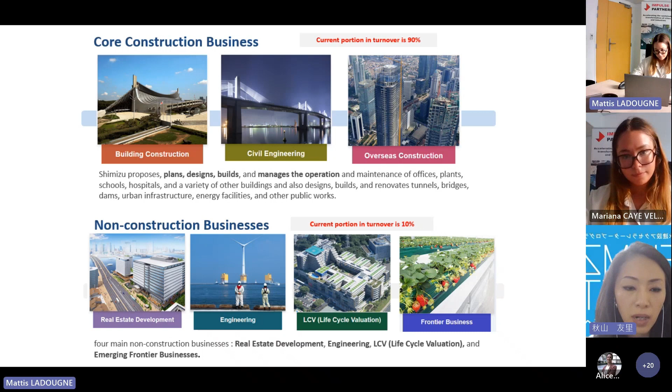Our business model is quite unique. We're involved not only in construction management, but also in planning, design, and construction management of architecture, buildings, and infrastructure. Currently about 10% of our portion is non-construction business, which includes real estate development and engineering, like the energy sector, life cycle valuation, and frontier business, more focused on sustainable actions. We also have a great global network with 32 global offices around the world. I'd like to introduce our new accelerator program afterwards, but you guys can use our great network.

Yeah, and this is our sustainability and smart innovation vision by 2030. We would like to focus on a resilient, inclusive, sustainable society to realize that.

Now I'd like to introduce our new accelerator program called Shimizu Next. This aims at solving issues by realizing a resilient, inclusive, and sustainable society. Currently we focus on three main pillars: construction and urban design, resilience, and environment and energy.

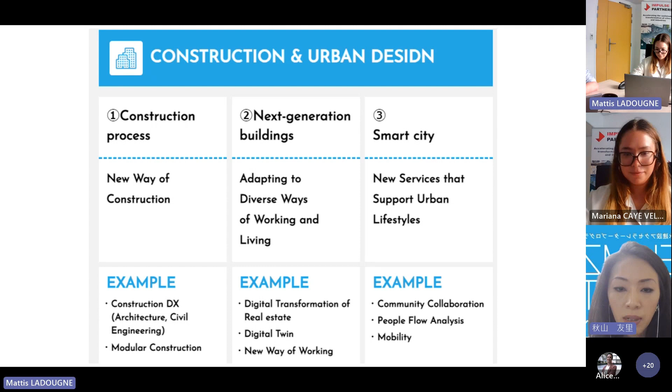From the first pillar, construction and urban design, we focus on three points. First is a new way of construction, such as DX and modular construction. Second is adapting to diverse ways of working and living, such as digital transformation of real estate, digital twins, and new ways of working. Finally, the third is smart city, which could be people flow analysis, mobility, and community collaboration.

From the second pillar, resilience, we would like to focus on disaster prevention, mitigation and prediction, and also security and BCP measures. From the third pillar, environment and energy: energy saving, renewable energy, and storage, and most important, decarbonization. We focus on CCUS, CO2 emission calculation, low carbon materials, and finally circular economy.

Yes, sorry. It's all right. Yeah, go ahead.

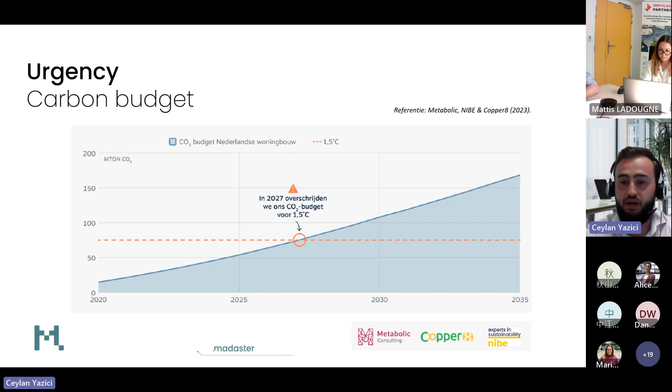This isn't specific to the Netherlands - well it is specific to the Netherlands, but I think every country will have this, and we all need to do a lot of work in order to not override the CO2 budget. That's where we come in, as Madaster will provide a tool to gain insights via a couple of APIs. We started as a register, and we're becoming more and more a tool to gain insights into circularity data and implement that within your business to reach your goals.

Madaster generates insights into materials and products and their locations, as well as their impacts on the environment, their future financial value, and potential reuse. We think that if you register it, it becomes more clear how you can reuse it, and we can drastically reduce CO2 emissions and waste.

So how does that work in practice? Here you can see a little visual of how Madaster works. Firstly, we have an input that we can see as an Excel template or a BIM model - the BIM model uses an IFC format, which is the one we use the most. The more input we have, the more output we can generate within the platform.

You will load in a BIM or an Excel file, and this will have some circularity data. Within the data, it will be connected to a database, which can say, okay, we will connect circularity data of concrete within the BIM model, and we can do that broadly within the whole model. What that will do, if the whole model is linked to the database and the circularity data, we can gain insights, generate material passports, and say something about circularity, embodied carbon, and financial valuation.

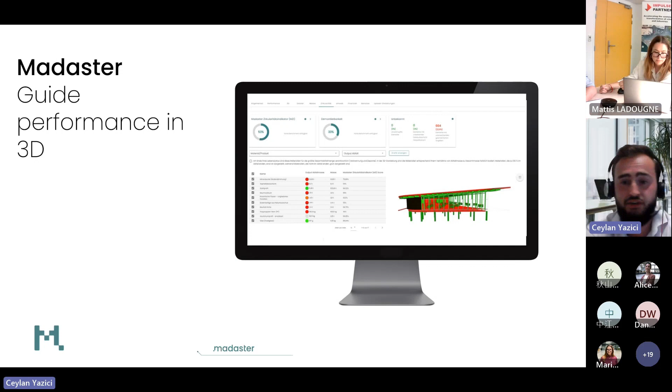Madaster can report and certify, so we can generate a material passport. For example, in the Netherlands, when you have a material passport, you can gain 1 BREEAM credit, and I can imagine this will also be in other countries. It's also possible to get a passport that's more a general summary - just quick circularity insights and that kind of stuff. But you can also generate a whole technical report which contains every screw that comes with it, if you want. So the platform does have that capability.

It's also possible within Madaster to benchmark. So if you have a building A and you are now doing building B, you can compare them with each other and see which building will score better.

Some use cases - please also click on it. We're also busy now with the Dutch Expo Pavilion in Osaka called New Dawn, which will also be fully registered in Madaster, and it will be designed by the Dutch architects, RAU Architects. So please, if you have the slides, click on it - these are some user cases of Madaster.

We use a partner network within Madaster, and we use that within the whole of Europe, and we hope within the whole world. With the partners, we will accelerate our knowledge and gain more and more data in order to better the platform and make the usability more friendly for everyone.

There are many issues with diesel generators. Construction sites don't like using them on the whole, even though it's been a de facto power creation method for a lot of these sites. They cause a lot of noise, which is bad for the local community but also for the people working on site. They tend to be pretty unreliable, so they break fairly regularly. Funnily enough, the cleaner versions of the generators seem to break more frequently.

You also have to refuel them, bringing trucks of diesel inside. It takes up space because you need diesel tanks next to the diesel generators, so sites really don't like having to operate these. The diesel itself is actually a fire hazard, so you have to be extra careful with those hazardous materials and store them properly. Most diesel generators are old technology, so they don't have any connection or much data you can get back from them, so you can't really see how they're operating or how the equipment connected to them is operating.

But most importantly, of course, they have a very high carbon footprint, and they emit a lot of air quality pollutants too. These generators run all day during the construction process, and they are very big engines, so compared to cars, they emit a lot of pollutants.

So what we did, together with this company, is develop the Ampd Enertainer energy container, a cloud-connected energy storage system designed specifically for construction sites. There are things we've done to make this as simple to use as possible - it's a very easy to deploy system, very similar to a generator, with a lot of extra safety aspects built in for the construction site.

It's mobile, so you can move it around - you can see it's got rigging points around the top, so it's easy to move when you need to. It also has a digital platform focused specifically on the construction industry, which has been very well received, because we can often do preventative maintenance, see if issues are happening, and get a lot of operational data back from it.

How this works is essentially a lot of construction equipment needs quite high power, but not very frequently. A crane, for example, when it's lifting a weight, tends to have a very high power spike, but then most of the day it doesn't do very much - say 95% of the day it's not doing very much.

But what you need to do is power it with a very big diesel generator, which just sits there idling, burning fuel a lot of the time because it's not doing anything. What you can do with a battery is take a much smaller power feed and have the battery manage those very high peak loads.

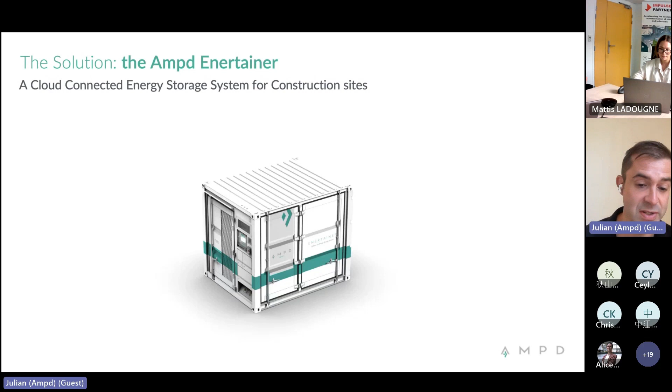Just to give an example, on some large cranes you might need 400 or 500 amps of power, which would usually require a 400 kVA or 500 kVA generator. We can power that on 20 or 30 amps. So you can either use a very small grid connection, or a very small generator run very efficiently, which vastly reduces the amount of diesel and emissions. And if it's a grid connection, you can sometimes have no emissions at all.

What this means is you can reduce your carbon footprint by 85 to 90%. Actually in the UK it's more like 90%. You can completely eliminate the air quality pollutants which affect the workers and people around the site. It's much safer because you don't have to handle the diesel.

It's 32 times quieter than a diesel generator, which not only is better for the workers and their ears and the local community, but actually allows sites to work longer hours sometimes, because a lot of sites have limitations on noise up past certain hours.

And also what we found out is it's more cost effective. So you actually can save money by using a battery on these sites, which is actually why most of our customers do it.

We give a lot of data back. So we have remote operations and maintenance, and it gives the site, sustainability people in the construction companies, the operational people with the unit, the project directors who want to understand how busy a crane is, a lot of data back that they can understand how their construction site is going.

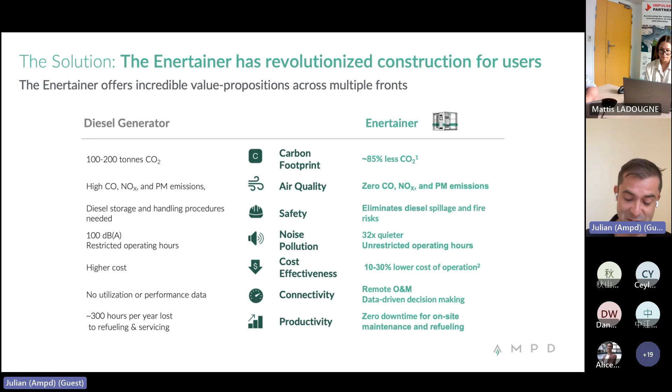And it also increases productivity. Some of our customers tell us they lose 300 hours of productivity per year due to refueling and servicing of the diesel generators. Our product is incredibly reliable, which means that people can just leave it there. It does its job. You don't have to touch it or anything like that.

So because of all these factors, we have been relatively successful. We delivered our first product at the end of 2019. And since that point, we've had 200 units delivered. Those 200 units have now clocked up over 2.2 million hours of operational time across 170 projects.

We have over 60 customers in Australia, UK, Hong Kong, and Singapore, and we're operating in those regions. We're having units now being sent out to the UAE and the Middle East. So that's coming soon.

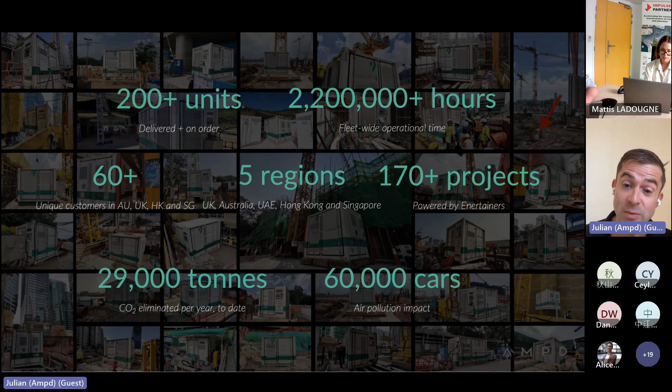Most importantly, we've mitigated over 29,000 tons of carbon dioxide which otherwise would have been emitted. And we have removed the equivalent of 60,000 cars from the road in terms of air pollution.

And the great thing is it continually updates over time, so the product gets better and better. And we give real-time operational data. There's remote maintenance functionality where we can understand what's going on with the unit and prevent something before it happens. Carbon reduction information in there and energy reduction information.

And then we also provide things like monthly reporting for people to go back and see how the unit's been operating over the previous months, which is great for sustainability people, energy people, even the people who look after the product.

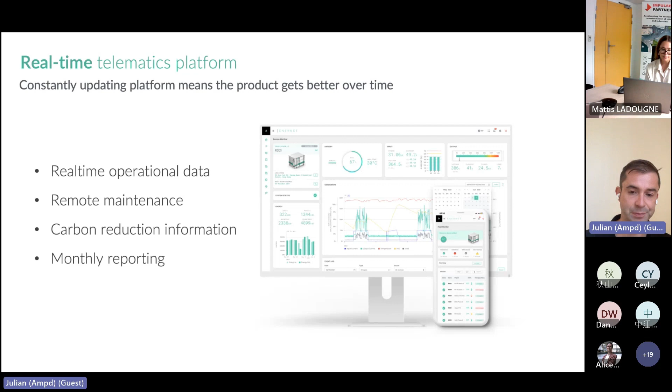So what we have now done, as I mentioned, is expand our initial product line. So the Enertainer was really our first product. The Enertainer M and the Enertainer L were our initial product. But what we've done is taken our expertise and expanded it into a higher energy product.

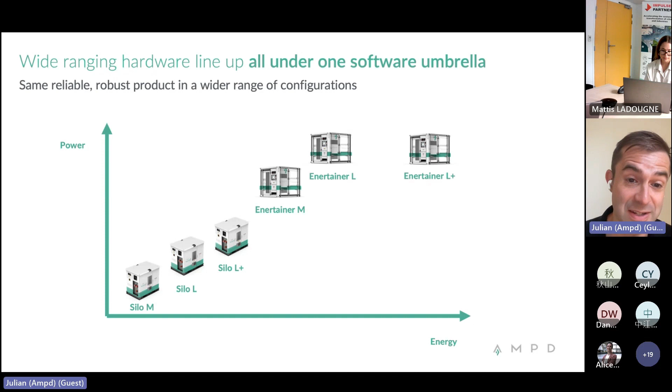And we're also next year bringing out the Silo. The Silo is a smaller energy storage system, which will be usable and more economic in certain smaller power use cases. And so we have a different range there.

And these are just some of the things that we have either had customers come and ask us about, or we've actually implemented, which are different types of use cases. So with the smaller unit, we can look at smaller site office setups, smaller cranes, concrete plants, the operation of which is often driven by diesel generators, welders, maintenance, roadside maintenance, even railway maintenance as well.

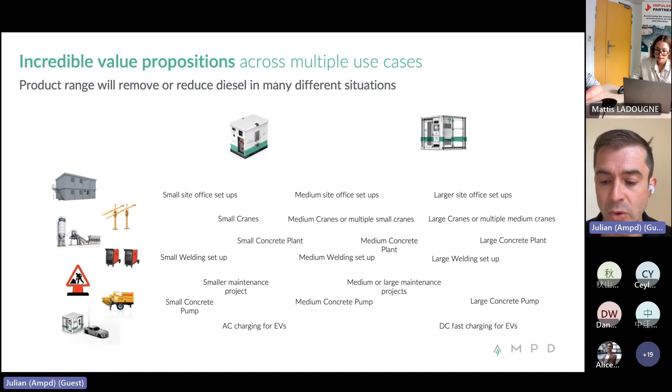Concrete pumps, which require very high power when they first start, and then EV charging. So we see that specifically in the construction sector, where more and more equipment is being electrified and needs powering.

And so that is my presentation. Please be in touch with any questions.

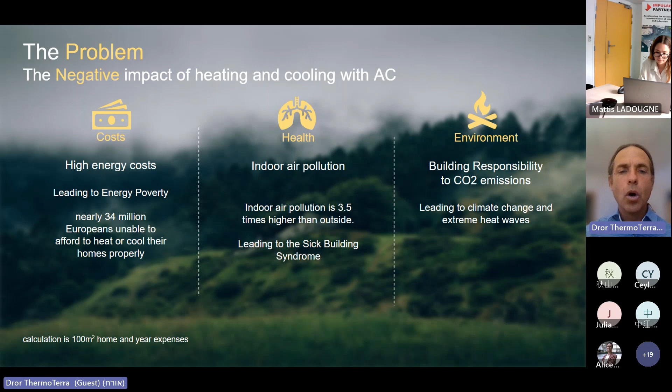On the cost issue, we can save 50 to 80% of the energy needed for heating and up to 100% of the energy needed for cooling. Thereby we reduce the carbon footprint of buildings, and we can make our system also with carbon capture materials. On the health issue, we are addressing 5 different aspects of our well-being, including radiative temperature, humidity level, and fresh air.

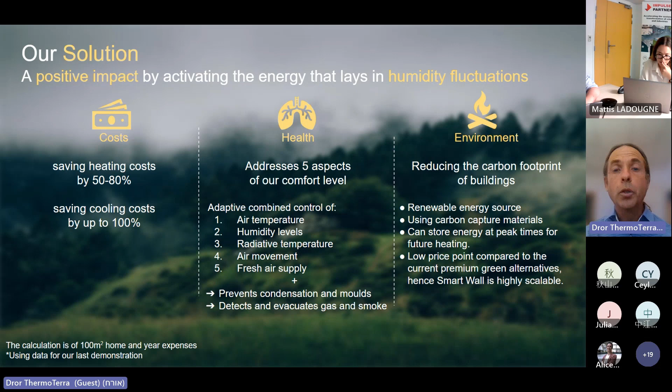So how are we doing that? We are taking the absorption capability of off-the-shelf construction material, such as bricks or insulation, and making that material into a humidity reservoir. Once we evaporate humidity from that reservoir, we get evaporative cooling. And when we harvest humidity back, we get absorption heating.

We are using air canals, such as holes in the blocks or air gaps in the walls, and use our IoT ventilation unit to blow ambient air through it, and then control whether we are going to do cooling, heating, or absorbing humidity for next cooling.

On the right, we can see a tiny construction we made at one of the universities in Israel, built alongside a reference building used there for different researches. We are going to see in the next slide the results.

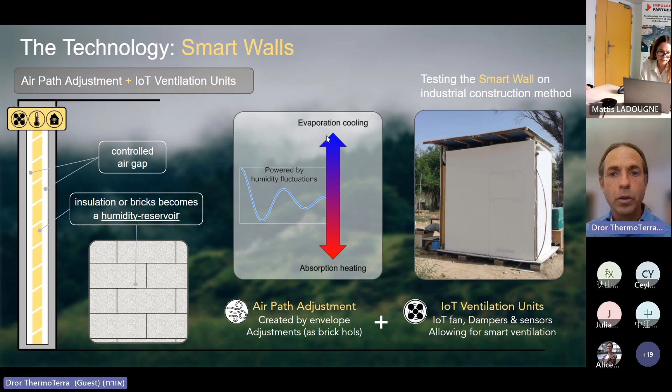On the yellow line, we see the ambient temperature reaching almost 36 degrees. On the orange, we see the reference building getting to 32 degrees. And on the blue line, we see Thermoterra technology walls cooling the building by more than 10 degrees, making it comfortable all day long.

On the left side, we can see how this happened. During the night, relative humidity was higher, which is what usually happens at night. So our reservoir could harvest humidity from the ambient air. In the first hours it was stored, and then when cooling was needed, the wall started evaporating the humidity, getting this amazing cooling result.

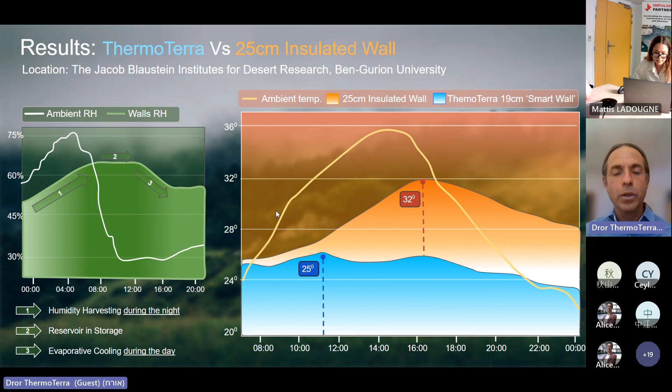On this slide, we see a few days of results, starting at the same temperature. Both buildings started at the same temperature, but our construction, using its ability to cool, kept 24 degrees all of those days almost without any energy needed, just using energy harvested from humidity fluctuation. And although our construction was thinner than the reference construction, it had amazing cooling results.

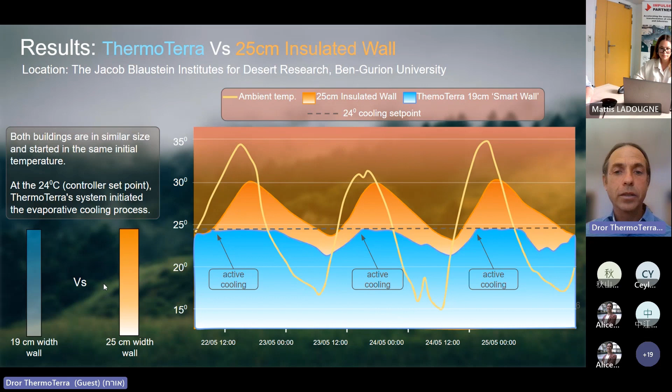There are many companies trying to solve the negative effects of air conditioning. Some are using smart thermostats, others evaporative cooling or even photovoltaics, and some heat recovery ventilation. But there is no company doing all of it in a cost-effective manner with a low carbon footprint.

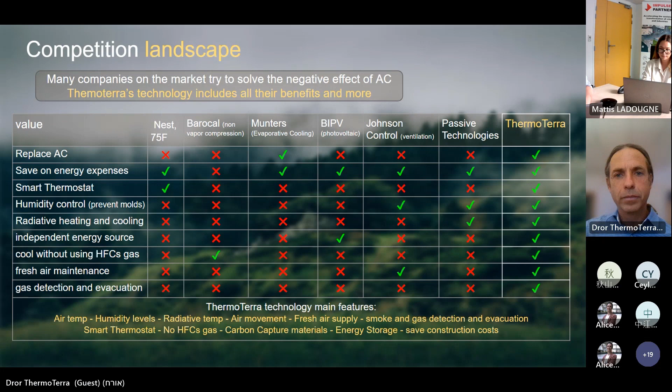In our business model, we use our construction partners' capabilities, so they will make the wall adjustment, creating Thermoterra-ready walls on the market. Then we directly sell our services and IoT ventilation unit to the customers. Our partners will not only gain easier compliance with regulation and provide a premium building for customers, but they will also save directly on their costs.

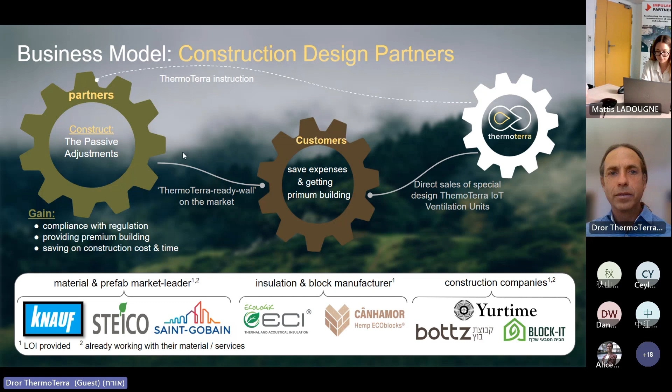In this example, we can see that our construction partner can save 10 to 20 euros per meter just by making the walls thinner. And the building owner, the end customer, will return the investment in only 26 months.

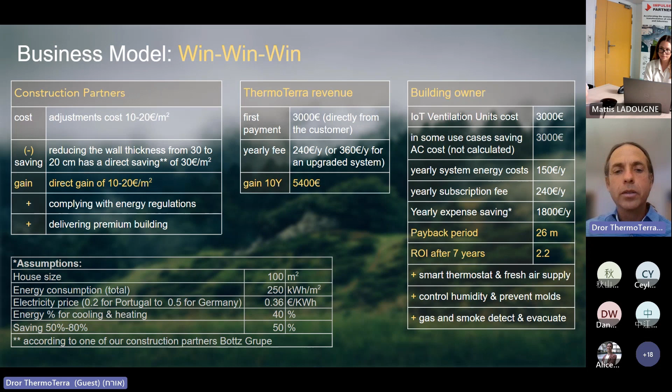The global green building market is huge, more than 700 billion. Still, we are addressing a very small market. Our entry market is natural fiber insulation, which is best suited for our adapter since it's conscious of both carbon footprint and health issues.

We already got engaged with some construction partners and manufacturer partners. One of them is Steico, a German insulation company that sells for more than 60,000 houses a year, and the construction you saw before was built with their materials.

Our next market is building retrofit, a huge market in Europe, where they are planning to renovate more than 35 million buildings by 2030. We will also address the building-integrated photovoltaic market, where on top of cooling the building we can reduce photovoltaic temperature, thereby increasing their manufacturing capabilities. We will also address the double skin facade market and the acoustic tile market.

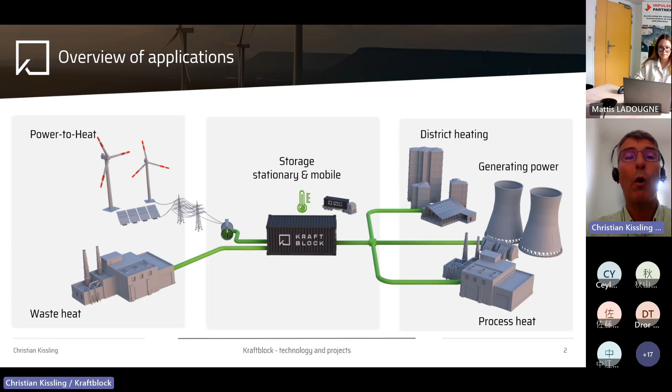The speciality, the unique selling point of our application, is that we can tap energies up to 1,300 degrees Celsius. We start about 350 degrees upwards. We have a very modular setup. As you can see, the containers are 20-foot containers, either one or several of them, and the storage duration is from several hours up to 2 weeks.

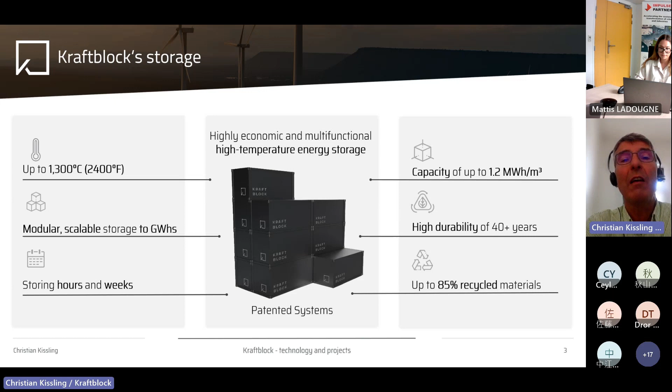Our material is a granulat, which I will show you a little bit later on. It has a very high heat capacity. We tested our material in life cycles up to 15,000 cycles, heating it up from ambient temperature up to 1,200 degrees and back, and we figured out there was no degradation. What's very much of interest is that the material of our pellets contains up to 85% recycled material, which is, for example, slag from the steel or glass industry.

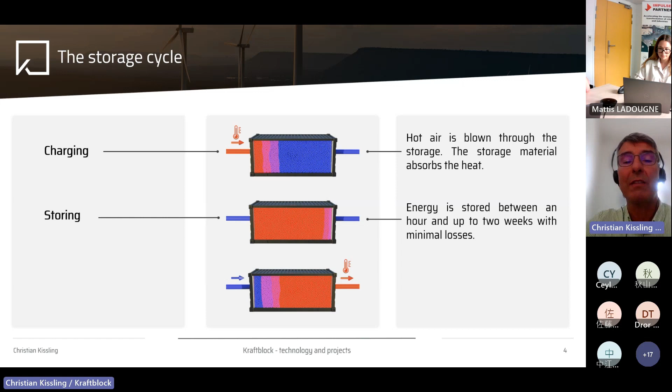How does this storage work? In the storage container you see these pellets, 2 to 4 centimeters in diameter. It's actually just a container with an insulation system filled with the pellets. The charging is done by hot air, which is blown through the material and heats up the pellets to the related temperature. During storage, the temperature is kept within the material at that level for up to about 2 weeks, depending also on our insulation system.

During discharging, when you make use of the energy, we again blow ambient air through the container. The air is heated up from the material and serves with the temperature whatever you have stored for the downstream processes. For the downstream processes, we come out here with, for example, 800 degrees. If you only need hot air of 200 degrees, it's just a simple apparatus to adapt, like a mixing chamber, where you use ambient air at 25 degrees with the 800 degree air and mix it down to the required temperature level. Similar for steam production or thermal oil heating. That means the storage is made very simple, and all the apparatus needed for charging and discharging are outside of our storage system.

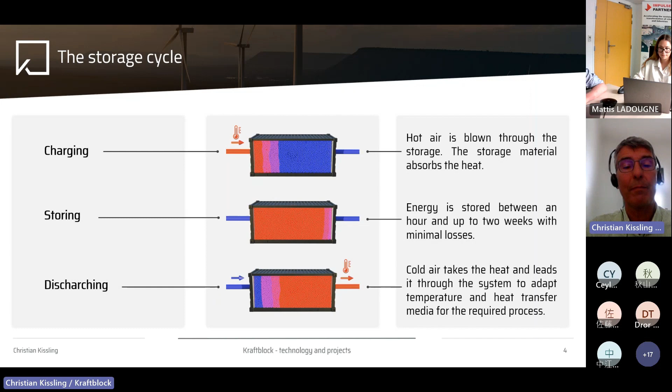Now I'll cover how to charge it via the electricity side. It's via green power, meaning we use either solar or wind power and so-called power-to-heat systems, which are like industrial hair dryers, if I may call them that. They are available in megawatt class and serve temperatures up to 800 to 1000 degrees. We store the energy here and then serve it for the downstream process.

The advantage is that renewable energy is mostly cheap power which can be used in the European market. We have fluctuating power prices on the stock market, and you could also benefit from the volatility of power prices. Curtailment of especially wind power in Germany can be prevented. It supports grid relief, and we can decarbonize downstream processes up to 1000 degrees, replacing fossil fuels. The industries include food, chemical, and steel industry, and all industries needing process heat up to 1000 degrees, or of course lower levels, down to district heating of 80 to 120 degrees. This can all be done by related apparatus downstream.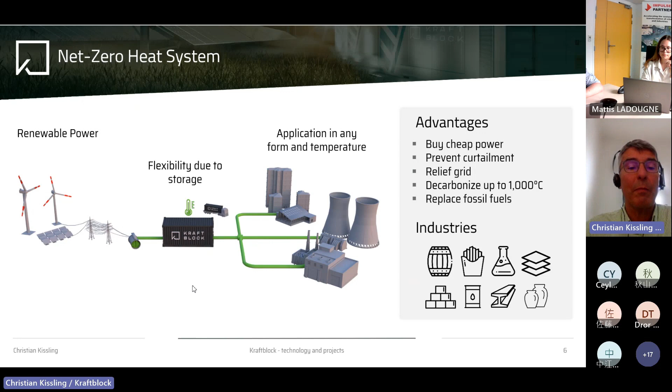We have this PepsiCo project I mentioned, where Eneco is the utility, and we take the power to heat up our storage system to 800 degrees. We are presently building the largest worldwide commercial high temperature heat storage, with a total of 150 megawatt hour useful capacity, built in 5 new modules. Two of those 5 modules, which you can see here, we are realizing by end of this year.

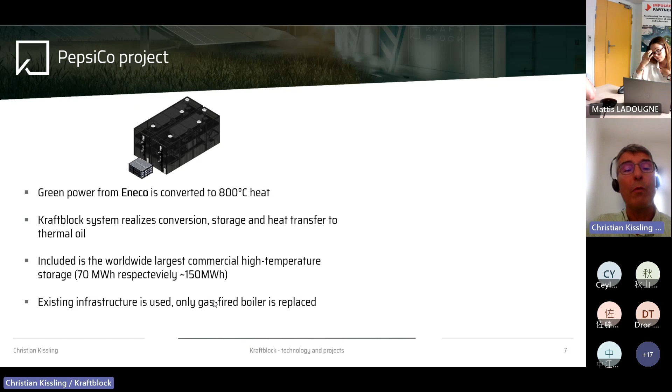We are using the existing infrastructure, and just the gas-fired boiler required in the potato chip production for heating up thermal oil is replaced with our storage system. That means the thermal oil needed to heat up frying oil for the potato chips will not be heated by a gas-fired application, but by hot air of 800 degrees coming out of our storage system, heating up the thermal oil from 250 to 300 degrees in order to do this process.

At the end of the day, when all 5 modules are installed, 98% of the emissions will be avoided, and PepsiCo is offering green potato chips.

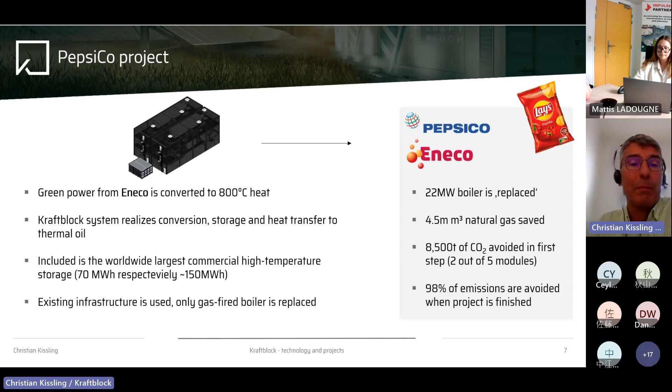Next application is the waste heat application. Here we take the waste heat from industries, which will be stored in our storage system and can be applied downstream for whatever is used on process heat.

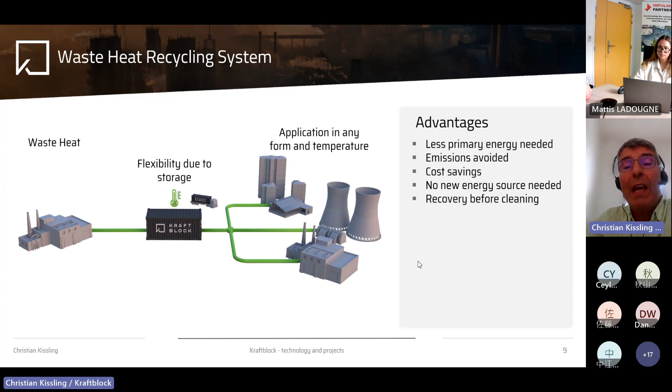Using waste heat, we have a reduction of primary energy. We are reducing emissions. We have cost savings, no new energy needed to be tapped. And we can even take high temperature heat from the glass industry or steel industry before the cleaning process.

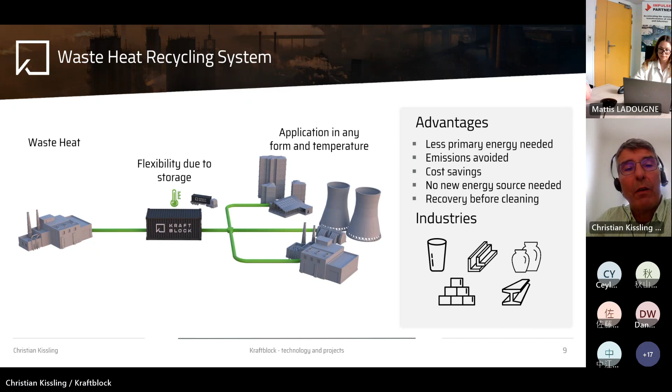The waste heat projects we have, three of them, I'll go through quickly. This is our reference plant where we take heat from a batch oven in the ceramic industry, collecting it for use in the next heating up of a batch process.

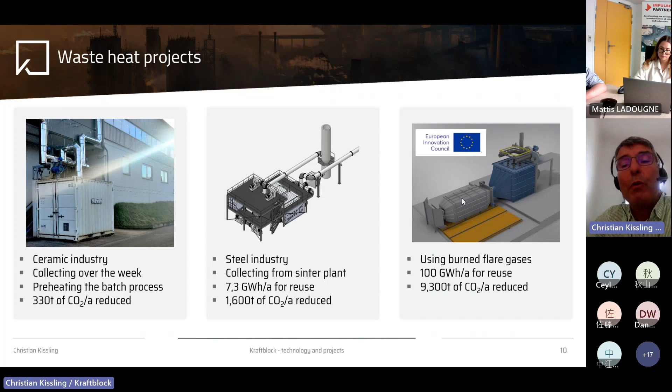This project is in the steel industry with Tata Steel. And the last one, which we are just realizing, is taking flare gas from the steel mill, combusting it in an adiabatic combustion chamber, serving it at a temperature of 1200 degrees, putting it into storage, and in this case also applying it as mobile heat.

That means this heat will be transported from A to B, as you can see in these devices, in this scheme. This is opening new business models with waste heat, meaning heat of up to 1200 degrees can be transported by truck and coupled to a downstream application.

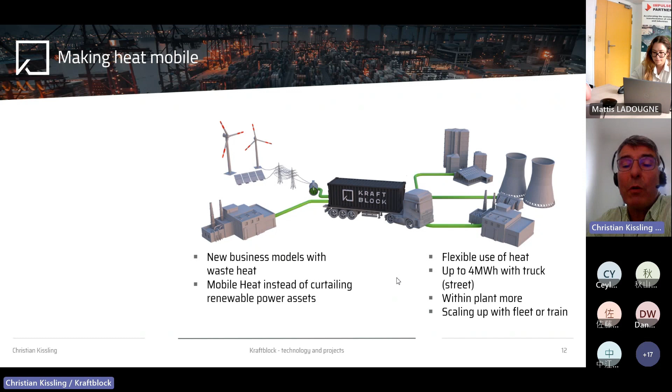Up to about 3.5 to 4 megawatt hours useful can be transported. The problem is the street has a maximum transportation weight, but it can also be scaled up by a fleet or even a train application.

And we already have a first mobile heat application up and running in the city of Hamburg, Germany. We take the waste heat from a biogas combustion engine, the exhaust heat at about 430 degrees, put it into our storage, truck it from A to B, and connect it on a docking station.

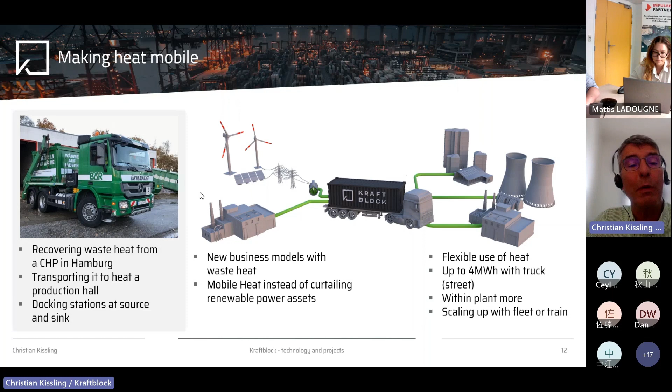To heat up an office building. So this is a kind of decoupling, not only time-wise but also location-wise, of energy, bringing it from A to B and making the best benefit for decarbonization.

And it's the last slide, about district heating solutions which can be applied via our system. We can take different sources, but they can all be handled within our system, increasing the flexibility of a district heating system or a quarter heating system.

It's a cost saving of available cheap energy. We are decarbonizing all this district heating. And what is also maybe of interest in case of integration of a new district heating system, in the beginning we can start with a so-called two-point grid when using this mobile application.

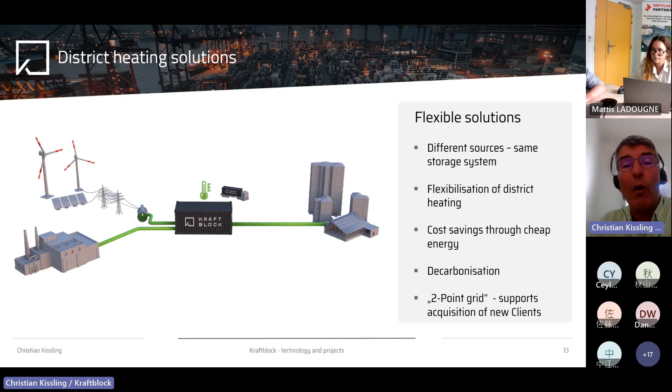So the acquisition of new clients can be supported because it takes a certain while until all the approval is given for a related connection and later the realization itself. But using heat transported by truck can overcome this at a very early stage in order to serve new clients with district heat.

And yes, this is it. Thank you very much for your attention, and if you have any questions, please let me know.

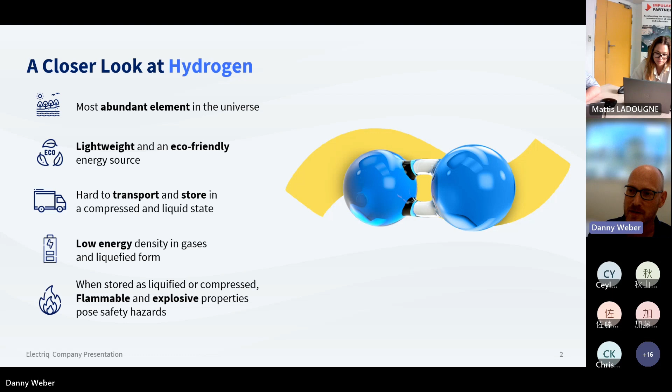It's hard to transport and store in a compressed and liquid state. It has low energy density in gas and liquid form. And when stored as liquefied or compressed hydrogen, it is flammable and explosive, which obviously is bad, especially on construction sites.

So Electriq pioneered a breakthrough technology that will transform the way hydrogen is stored, transported, and used. We have developed a novel type of hydrogen ecosystem based on the energy-rich proprietary powdered hydrogen, which I just showed you, and the release system that you can see on the screen now.

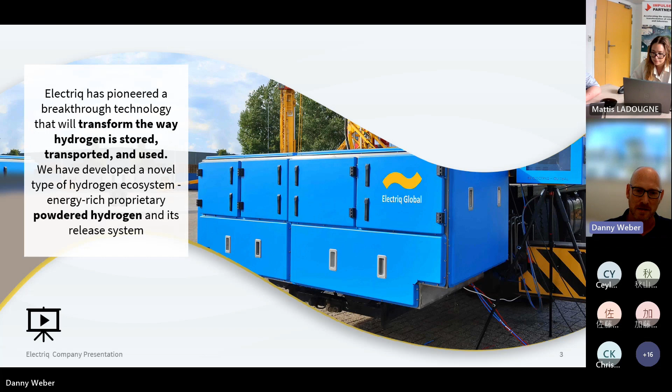This release system is actually mounted on a crane, though you cannot see it. It was demonstrated in the Netherlands last year, powering the crane's operation.

Our solution is based on two legs. The first one is the powder. The Electriq powder is safe for transportation and storage, it is inert and non-flammable. We produce it in a production and recycling plant. After production, the powder is sent to the customer location to be used as fuel for the hydrogen release system. The release system works at low temperature and low pressure, and it is optimal for off-grid applications.

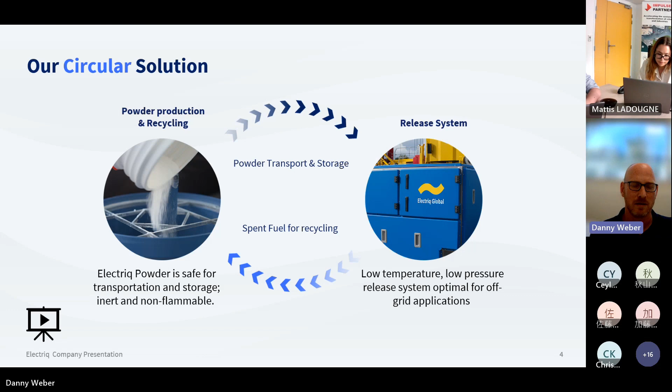Construction sites are a key application. After the system completes extraction of hydrogen from the powder—a process that includes mixing the powder with water in a catalytic process—all the hydrogen is extracted from the fuel, and the remaining byproduct is a liquid that is sent back to the plant for recycling. This means our solution is circular: the powder functions as a hydrogen carrier, carrying hydrogen from the plant to the customer's site, and then being shipped back to the plant for recycling and reshaping it back into hydrogen powder.

So the core of our value proposition, first and foremost, is that the powder is distributed like everyday products as long as it is kept dry—think of it as coffee or washing detergent. We do not need any special infrastructure or logistics to transport or store the powder. It has superior energy density than compressed or liquefied hydrogen. I will elaborate in my next slide.

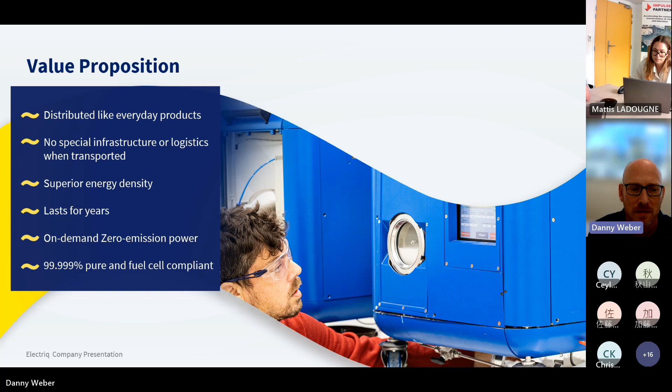The hydrogen can be stored for years within the powder. The chemical binding is very strong, and we don't have any loss of hydrogen from it. The power is generated with zero emissions and on demand—we release the hydrogen based on the electricity demand of the operating devices connected to the system. And the hydrogen is released 5 nines pure, which means it is fuel cell compatible.

To touch on the energy density, if we compare the energy density of our powder to other last mile power and energy carriers, we illustrate it by the amount of energy you can store in a 20-feet container. If you look at my slide, our solution is 2.5 times better than compressed hydrogen at 700 bars, 50% better than liquefied hydrogen, and about 4 times better than lithium-ion batteries.

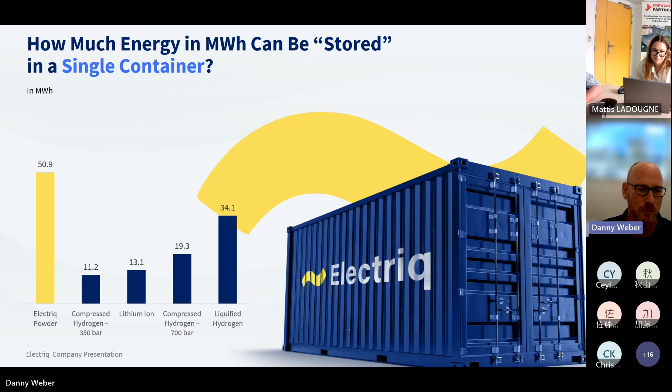So, how does it work? The process is based on mixing water and the powder in the reaction chamber using a catalytic valve. I think it's best that we just see a short video.

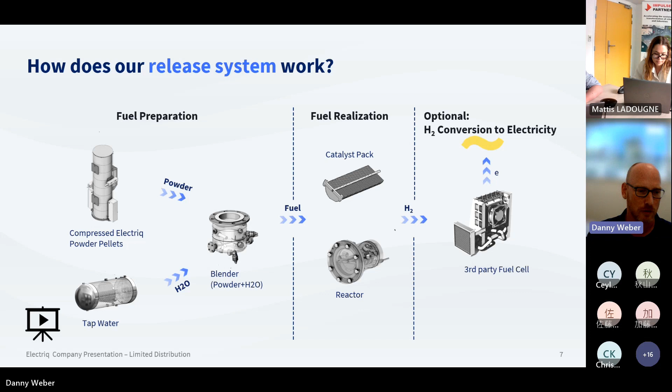So this is our genset. For illustration purposes, we also have a fuel cell in this device. We put the powder, in this case in capsule form, into the system. Then we mix the powder with the water in the blender, and heat it to 50 Celsius degrees.

Then we move the fuel to the reaction chamber, where the catalyst on the top side controls the amount of hydrogen that is released from the fuel. When the catalyst is fully covered in the fuel, you can see all these bubbles—this is hydrogen being depleted from the fuel. Once released, the hydrogen is moved to the connected power device, which can be a fuel cell or an internal combustion engine used for various applications.

Our target markets start with construction sites, but actually any off-grid, off-road machinery, and defense applications. You can imagine the benefits of a fuel that is not explosive nor flammable, with higher energy density. Also critical infrastructure, mostly for backup applications—it can be communication towers, but in the construction industry we also currently have discussions with customers looking for backup applications for elevators in high residential buildings.

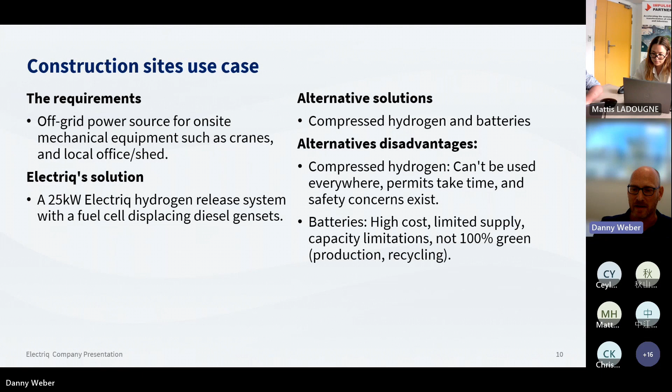And batteries, by and large, they are expensive. Today, there are limitations in supply and capacity. And we need to also take into consideration that they are not 100% green, taking into account the production and recycling CO2 emissions.

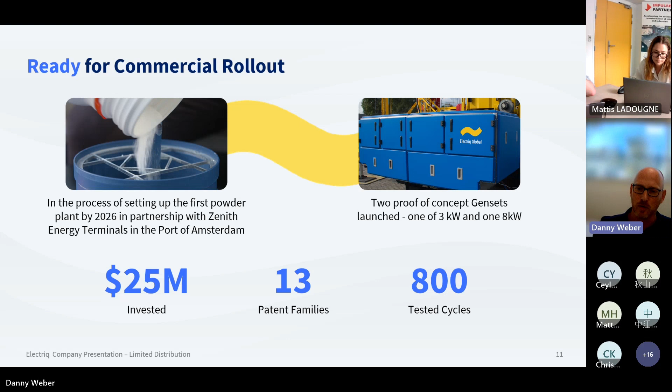So Electriq is ready for commercial rollout. We are building now the first powder production and recycling plant in the port of Amsterdam, together with Zenith Energy Terminals. We have already developed two proof of concept gensets of 3 kilowatt and 8 kilowatt, and we are going to launch our 25 kilowatt hydrogen release system next year. We'll be more than happy to discuss partnership on evaluation of our technology.

Thank you, Danny. We already have a couple of questions for you from the participants. The first one is, how much does it cost compared to a normal hydrogen operation?

So I would say that by definition, we are taking green hydrogen and we are binding it to a powder, and this process by definition costs money. However, our target price will be under €1 per 1 kilowatt released from the hydrogen.

The second question is, how about efficiency of your product? Do you have an example of levelized cost of storage?

So in terms of the efficiency of the solution, we don't require any energy to release the hydrogen from the powder. The hydrogen release system can release, I would say, near to 100% - we're talking about 98, 99% of the hydrogen that is released in the powder. I didn't mention that half of the hydrogen is contributed by the water in the spontaneous exothermic reaction that happens when you mix the powder with the water. So in terms of the energy efficiency of the solution, it is very high.